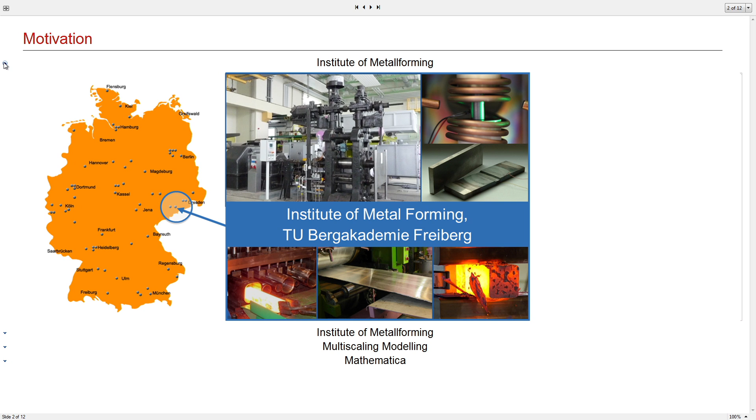First of all, where is the Institute of Metal Forming in Germany? Near Dresden and Leipzig. It's a small city, something like 30,000 people and 5,000 students, so we are really small compared to other cities.

Our institute has 5 working groups, teams, of which I'm head of one. We work together to describe materials and build new models to describe production processes, and also to generate models for very fast controlling, controllers.

In this case, we will concentrate on multiscale modeling. Maybe some of you have heard about it. This is the idea where we start from the atom scale and go on to something like crash testing and simulation. For that, we need very deep knowledge about materials.

Our group concentrates on this field. Here we leave this field to the physicists, and we work together with physics, and they give us models to describe phenomena like slip effects and so on.

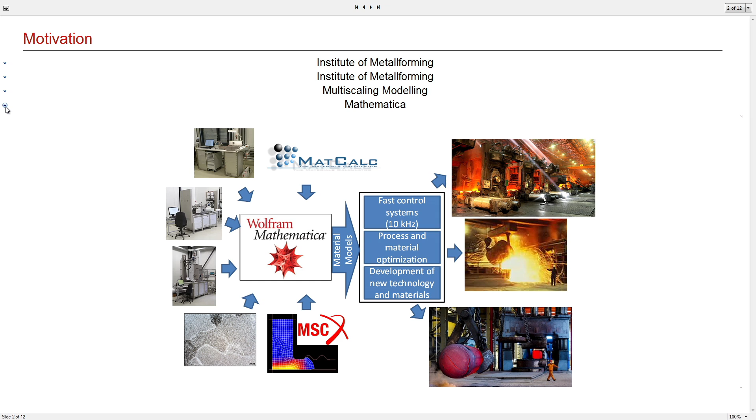What we use to solve our system, as we know, for material science or engineering construction, mostly the FEM method is used, which gives us a very smooth expression of phenomena.

I use here the finite difference method to describe all of those phenomena, because it was simple to implement into the GPU calculation. So I will show you everything about it.

So we started first of all with concepts. I don't know what happened. Sorry. First of all, in Mathematica, mostly functions used CPU to solve problems.

We can use 2 different ways to do this. First of all, we can use serial processing or parallel processing. It's very simple to implement, or use the compile function. Using compile, we can parallelize this, or use another function like parallel evaluation or parallel table, and so on.

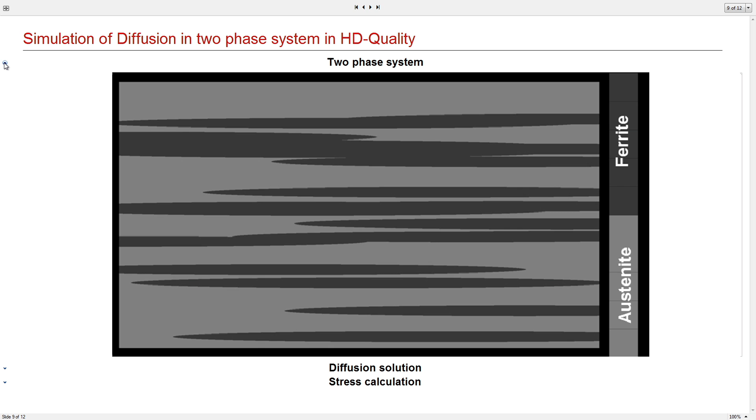Okay, what we can do with this new, maybe not new system, this idea: we can calculate diffusion. This is some system like 2 different phases in steel, for example. We have austenite, which has high solution of carbon, and we have ferrite, which has very low solution. So by diffusion calculation, we will see movement of atoms from ferrite to austenite, and we have 2 different diffusion coefficients, which we can also apply here.

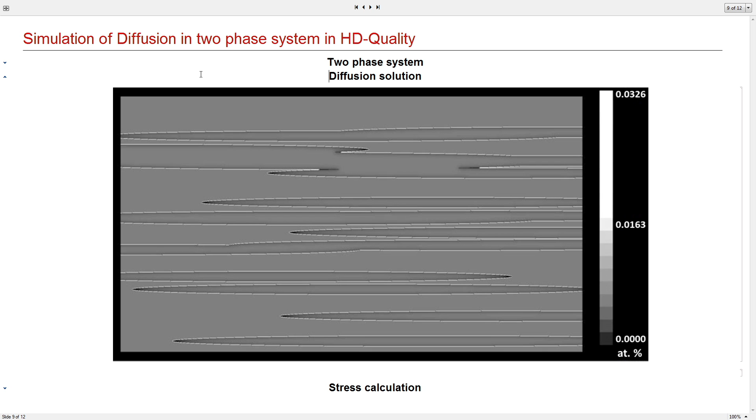If we get it, we get results like this. You can see some points. The resolution isn't so good because it was calculated in 4K and reduced to HD, so some pixels are not so pretty. You can see some problems with the calculation.

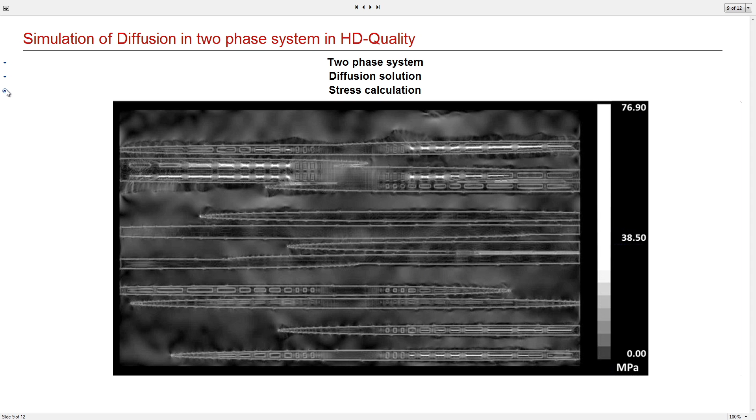If we want to get some stress calculation in this system, we can do this, and I can show you now the calculation results. The volume of ferrite is a little bit higher than austenite, so ferrite wants to get out of this and deform elastic or plastic austenite. So you can see the stress field, and you can see some plastic deformation where the stress is going down. That's the relaxation of plastic movement of some hexahedron.

Okay, if we use this model for deformation, we can use a model like this. It's a little bit complicated - it's something like how much I need to press to move some piece or some hexahedron in this case. So we declare this in this equation, which gives us nonlinearity of the equation, and here are some results.

Because this matrix, this piece, was also generated with the Voronoi method with different texture of grains, in material you get different slip lines of material in this case. So with 1,000 elements you get already pretty cool results for calculation, and also you get information for construction - how much you can deform or how much force you can put on some pieces.

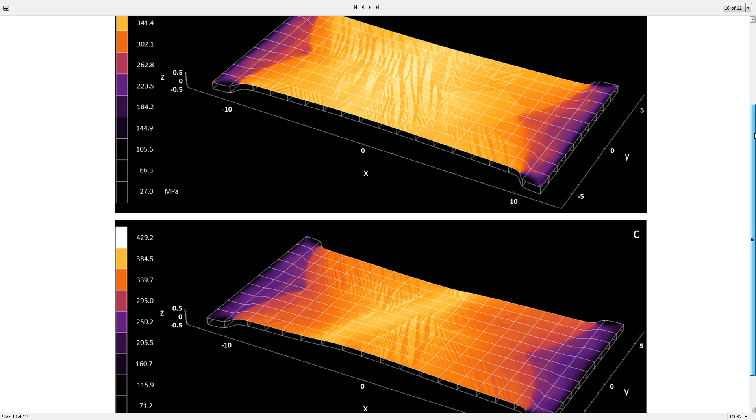Okay, now I'm ready with the presentation. I would like to show you some codes and some movies which we can also generate from this. I had a little bit of problems generating graphics and movies because everything was generated in Mathematica Graphics 3D, so if I put millions of elements there, it becomes a problem. But after 1 week, I had some movies.

So this is not this - here, for example, this computation of this last one. This is slip effects, which you can also see by deformation in reality. And those effects we observed also in our experiment facilities.

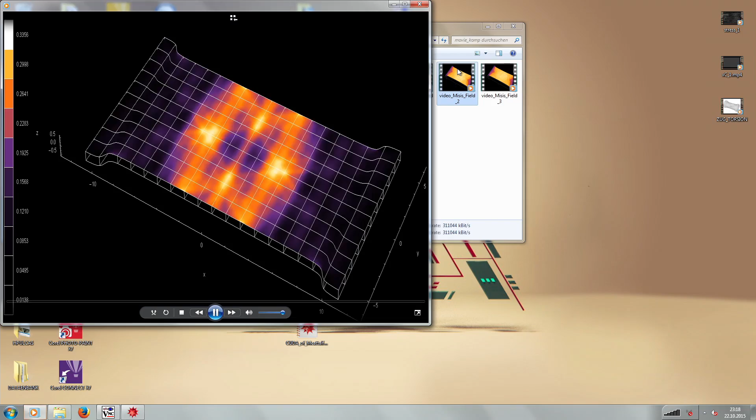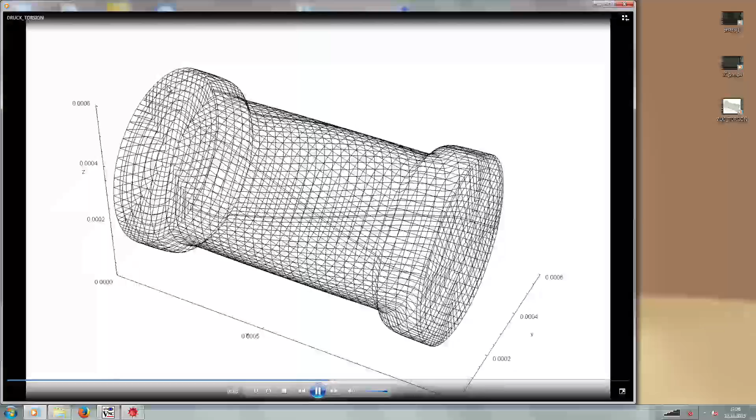Okay, here's simulation of deformation. I didn't get the cross section. This is 12 million elements which were simulated simultaneously on 4 cards, 4 graphic cards, because the system can make simulation of 4 different scenarios. It's really interesting to see what happens here, for example compression test with 12 million elements.

And here, for example, the tensile test of some piece of steel.

Okay, now I will show you some code. Because the code is a little bit - it's not only text, because this text interacts with my ideas, which I can show in those movies.

What are the dimensions in those movies, like roughly? 18 millimeters, so something like, I don't know, half an inch, something like that. A little bit smaller, or larger, I don't know. The grains are large in this case because this is electrical steel with very large grain size.